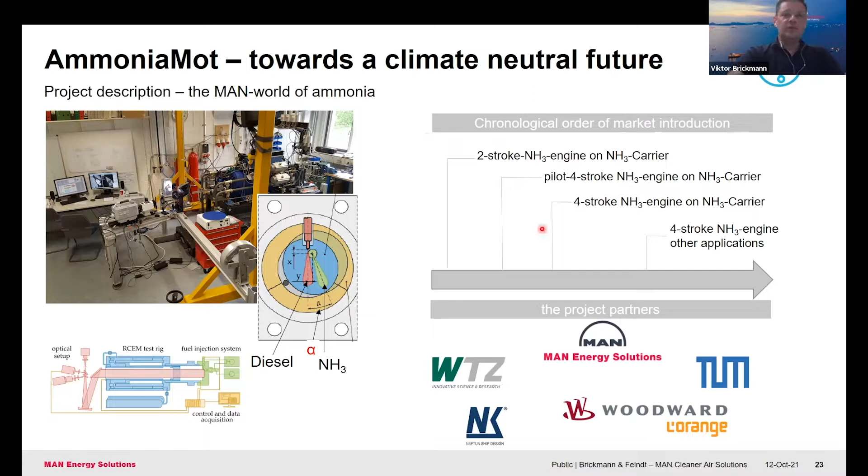Yeah, so I would like to take over from these quite broad and global view that Alex was reporting to you. I'm based in Singapore with a clear focus on high-speed engines, which are usually in the lower power range compared to the big medium-speed engines. So we're talking about a few hundred horsepower up to 4,000 kilowatts, which is around 5.5 thousand horsepower.

Just to wrap up what Alex was saying, in the last few years our company has conducted some surveys with customers to investigate their expectations and views on future fuels, for example in 2035. Hydrogen was number one, a very prioritized rank, because this is the hype or the trend which is quite clear in Europe right now. So many companies are investigating this.

So this means for our company, the way to decarbonization is actually set. We are investigating hydrogen topics in the technology, how to handle this, how to consider the infrastructure and so on. But the way towards hydrogen is long, so we also need to serve the market and the customer needs, which from now on is diesel and gas. There will be some intermediate steps.

For my part, I will tell you a little bit about biogas itself and biofuel, which are considered as intermediate steps between diesel as a fossil fuel and hydrogen. Of course, this is quite related to the combustion engine, to the combustion process itself.

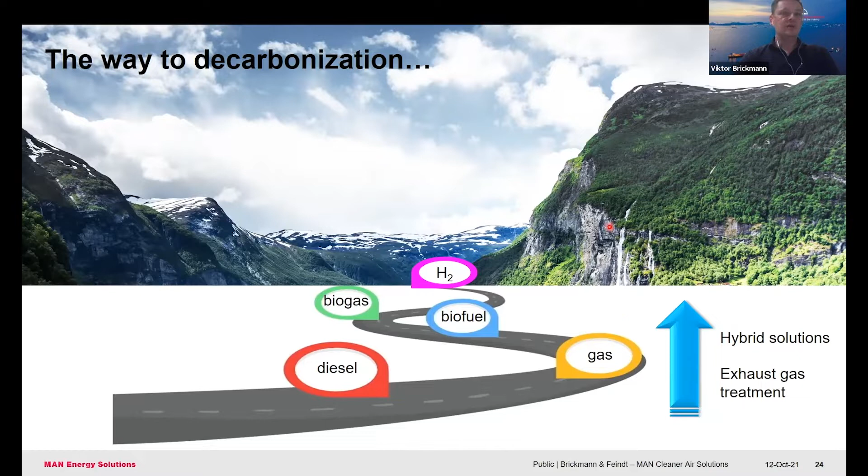First, before going into detail with some technical stuff about the fuel itself, let me show you what is actually the view of Thailand on fuels and energy. This is a screenshot taken from an official presentation uploaded to the internet by the Ministry of Energy.

If we see the comment below, the Prime Minister, during his speech at the Conference of Parties related to the Paris Climate Agreement, was clearly saying that Thailand is pledging to a 20 to 25% reduction in its emission of greenhouse gases. This is a clear sign that Thailand is heading towards decarbonization.

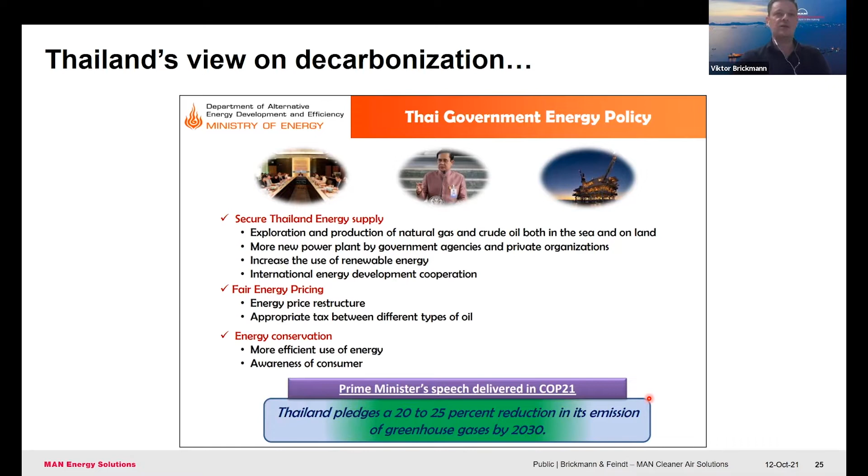Decarbonization itself is an interesting topic. Are we considering the emission itself—meaning, if we're talking about the combustion engine, what is coming out of the exhaust gas pipe—or are we talking also about the complete, entire cycle? This I will show later on.

This is the other slide I'd like to share. According to this approach of Thailand's government, there's a clear alternative energy development plan focused on the years from 2015 to 2036. A lot of R&D activities, as well as construction and power generation activities, are also subsidized by the government. That's why, as said before, I would focus here on biogas itself and biofuel.

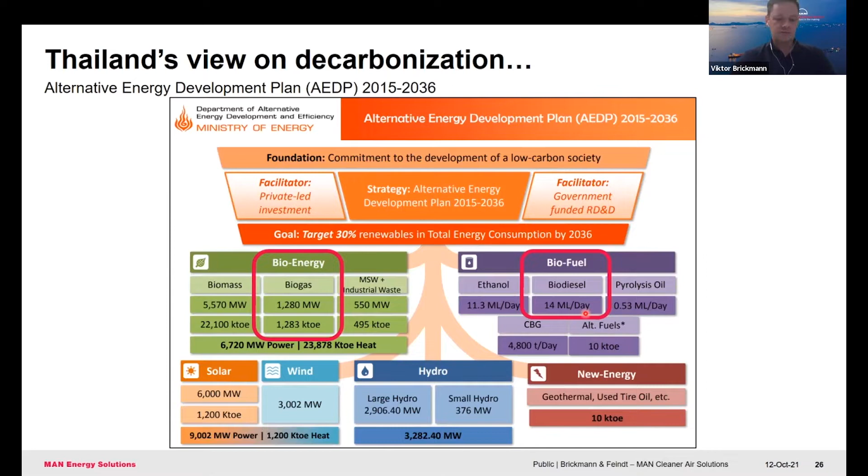Okay, so starting with the biofuel itself—what is actually the biofuel? In this case, I'm talking about liquid biofuel. I'm not talking about fuel in general, because fuel can be everything, but biofuel in liquid form. Actually, it's quite comparable with diesel in consistency—this is a liquid which you can fill up in tanks and burn in the engine.

The question is where the biofuel comes from. Actually, the biofuel is coming from chemical processes of the biomass, from renewable sources like soya oil, or animal fats and tallow and so on. We need to consider how we can use this in our technology. The advantage of biofuels is that the biofuel itself can be considered as nearly 100% CO2 neutral, and this is what I mean.

Of course, during the combustion there will be some CO2 production, but during the production of this fuel, the CO2 is absorbed by the biological processes.

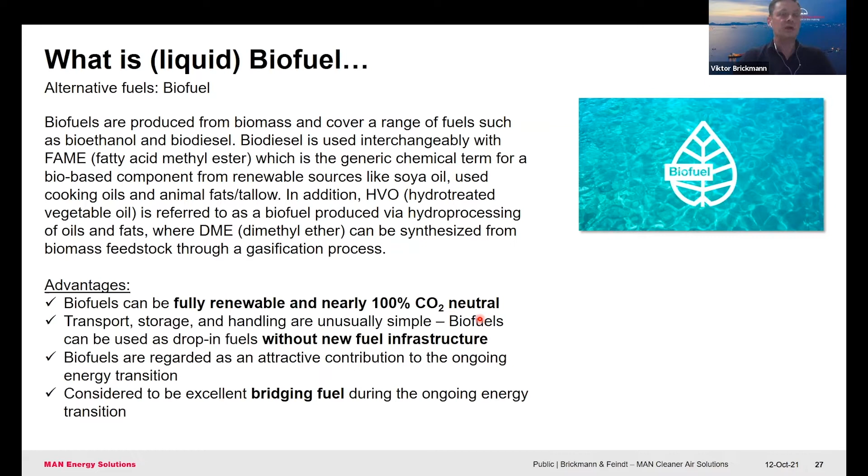Regarding these projects, or the market itself, in Thailand we don't have that many projects focusing on biofuel. The requests from customers are rather coming from Southeast Asian countries like Malaysia and Indonesia, because the governments have a huge focus on palm oil. And of course, if there's an excess of palm oil, the companies are looking at what to do with it, because there are some ethical backgrounds about palm oil, which I will show you a bit later.

So the question is where the biofuel comes from. We define 4 generations of biofuel. The first generation is generally the edible biomass, which can be sugar, vegetable oils, palm oil, everything which can be used for food itself. Currently, if we consider the amount of sources and oil, this makes up 99% of today's biofuel. That's why there's a huge focus on this one.

The second generation is the non-edible biomass, coming from different types of feedstock. It could be waste, non-food crops, for example some corn crops not intended as food for human beings. Some biofuel is coming from animal waste or public waste and so on.

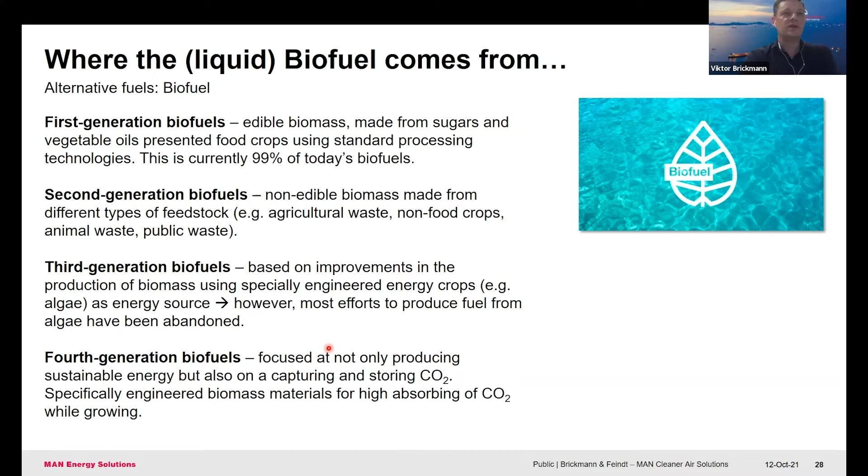The third and fourth generation of biofuels are, so to speak, the next scientific stage of biofuel itself, for example coming from algae and specific engineered energy processing products. We're not focusing on those because they require more investment in technology and chemical processing. So on the next slide, I'm focusing on the major part of biofuels, which is the first and second generation.

The big difference between these two generations is that one of them is edible and can be used as food, and the second one is not edible.

So just to show you the pros and cons of biofuel itself. In general, we can say that biofuel can be almost fully renewable. It comes from animals, it comes from plants, it can be used for energy generation, and it will grow again, like using wood for specific purposes.

And here, similarly, if we consider the chemical processes, which I will not explain here, in the combustion process the generation of CO2 is actually less compared with fossil fuels.

This is, for example, what we found out during our recent test here in Singapore. We have a field test right now with a smaller engine on one of the pilot boats for the Singaporean Port Authority, and we ran this engine on biofuel on our test bed in Singapore, measuring the emissions. Quite interesting is that we had indeed some reduction of CO2, but depending on the source of the fuel, we also had a higher emission of NOx.

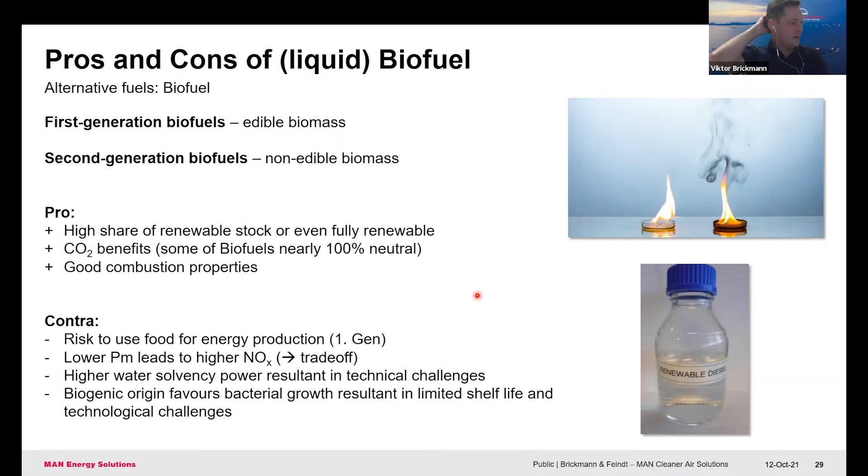The other disadvantage of biofuel, because the source is biological, is that we have a lot of bacteria and bacterial growth, which leads to other technological challenges. For example, we get sludge in our oil tanks, and we have challenges with sealing materials in engines, coolers, or pumps getting untight, so there are leakages. This is what operators, shipyards, and power plants have to pay attention to.

Just to show you which engines are able to burn biofuel - this is a focus from my side. We have the MAN engines, and Alexander was mentioning MAN Truck and Bus. We supply these engines for very different applications, be it marine applications for small ships or a power plant somewhere on land. These engines are able to burn biofuel, considering all the technological challenges we have to pay attention to. The newest generation of our high-speed engine is the 175D.

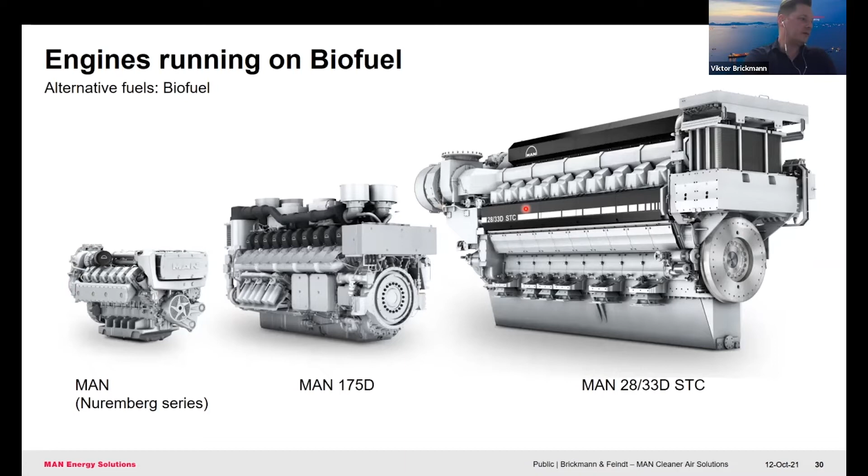This is where the experience comes from. We had some 'children's sicknesses' in the beginning, where we saw leakages of fuel because the sealing materials were not resistant enough. The customers or operators had challenges with fouling tanks and clogged filters, because during the life of the biofuel, even if it's only a few days, we have agglomeration of sludge which clogs the filters. Quite interesting.

That's what I mentioned in the previous slide - Malaysia and Indonesia are looking more at biofuel because they are considered the biggest manufacturers and suppliers of palm oil. The palm oil itself can be used as food - if you know Nutella, this chocolate cream which is quite famous, part of the ingredients is actually palm oil. And this is one of the ethical backgrounds of this.

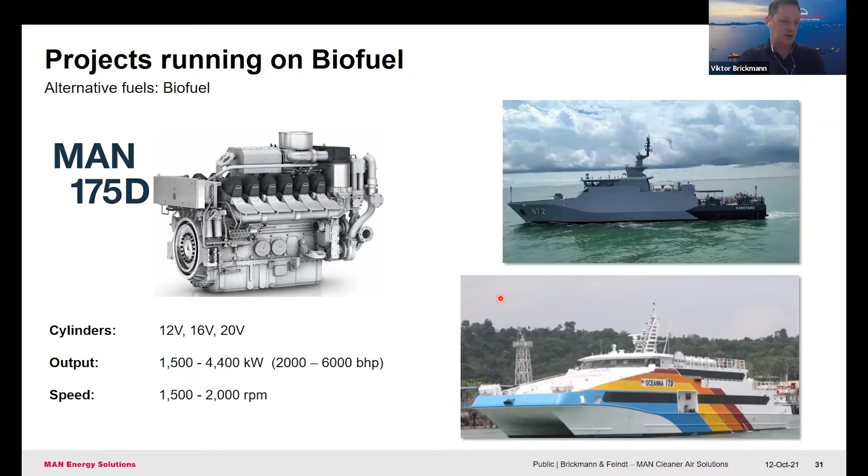How can we burn the fuel itself to create energy, whilst maybe there are children in Africa starving to death because of hunger? This is the way we should look at it as well, not only the technological view.

Okay, there was a mix of marine engines. Now I'm coming to the industry technology itself - the same engines with the same size can also be used for small power plants. In this way, I'm trying to get the transfer to biogas itself. Biogas's chemical process is similar to what we have with biofuel. The biogas is actually coming from biomass and waste products.

Compared to biodiesel, this is a gaseous condition. Biogas has lower emissions regarding sulfur and nitrogen oxides, which is better for the environment, for the air itself. Similar to biodiesel, we have a cycle where biogas is a carbon neutral fuel and can be considered a full substitute for fossil fuels if the engine is able to run it. Thinking back to the slide showing the way towards hydrogen, biogas can be considered a bridging fuel, as long as we are working on higher technologies.

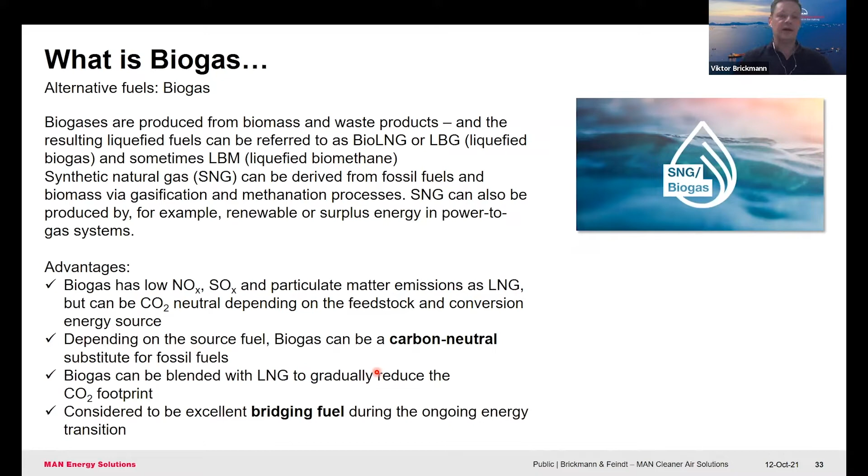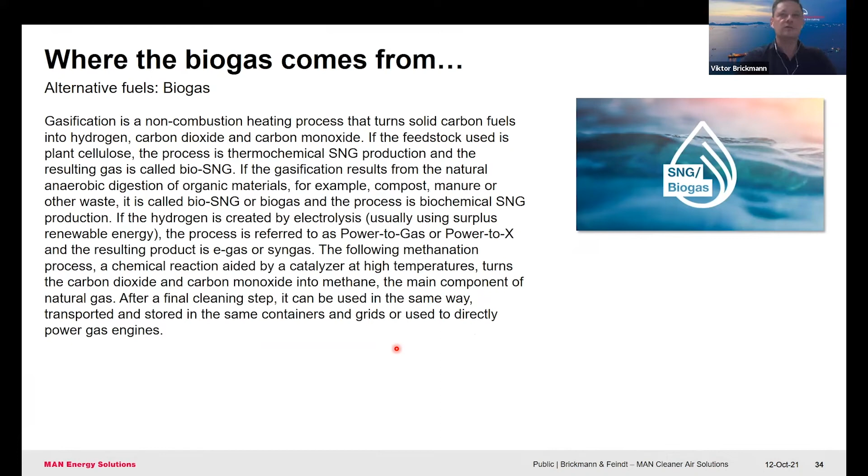Again, similar to biofuel, biogas comes through natural processes which are more understandable from this slide. We see it can come from livestock or just biological biomass. This is stored in a digester, where the chemical processing is ongoing and the gas is generated. The biogas itself is purified to make it sufficient and suitable for engine combustion. The engine can run on gas, and depending on the purpose, it generates heat or generates electricity when coupled with an alternator. This is provided to households, which again is considered CO2 neutral - this is quite a simple illustration of the process itself.

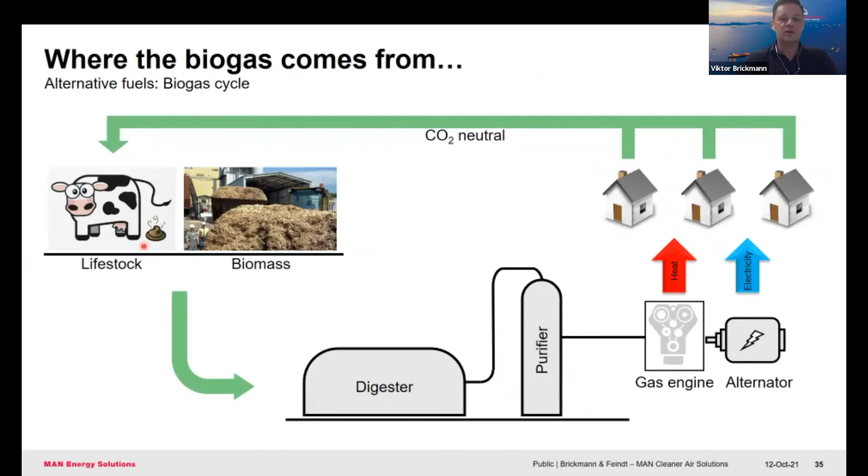So here's just for comparison, how much biogas we can create out of livestock, and how much energy we can produce out of it. For example, one cow produces recalculated 500 cubic meters of biogas, which we can use to produce 1,100 kilowatt hours of electrical energy. To make it more comparable, one cow produces approximately the same amount of energy as 100 pigs or 500 chickens, or 2 tons of corn cobs.

Of course, we need to understand how much space do we have. Thailand might be different. In Singapore, such generation of biogas would be unthinkable because of missing space.

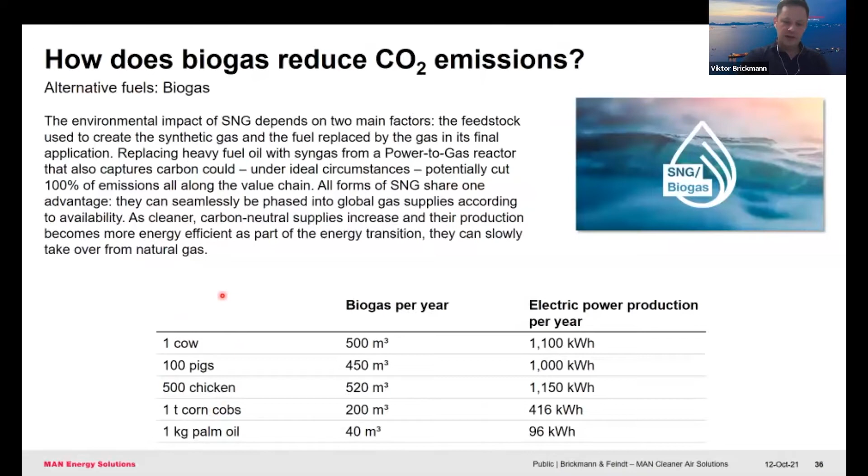For the Thailand power market, it's especially interesting because following this alternative energy development plan, which was introduced by the government since 1992, the government is purchasing electrical power from small power producers, which can be of different applications.

There are some regulations which have to be fulfilled by these small co-generators. For example, they have to supply electricity to the grid during the peak months, March, April, May, June, September, October. During the entire year, the production of electricity must not be less than 7,000 hours, which is a little bit of advertisement for our engines. Our engines are capable of running this amount of hours.

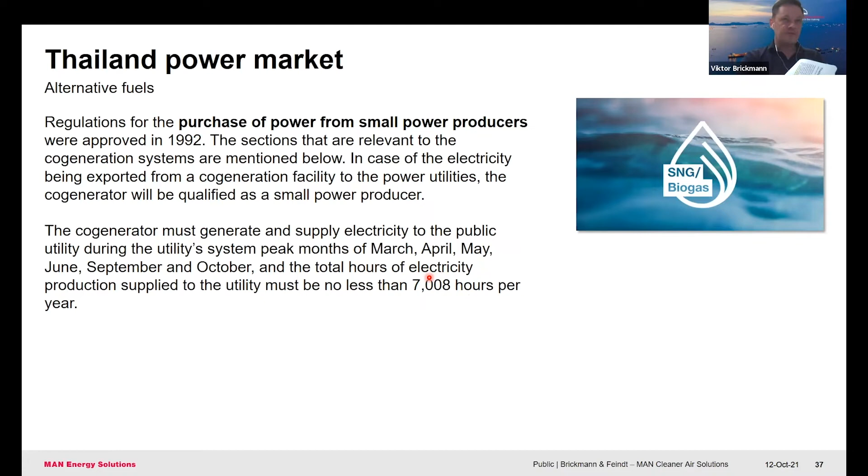To show you what are the references, more or less, which we've realized over the last 10 to 15 years - the main customers in Thailand are the farms, be it palm oil mills or pig farms. One example, we are working with a farm which produces electricity for their own purpose, and they have between 20 and 30,000 pigs in one location.

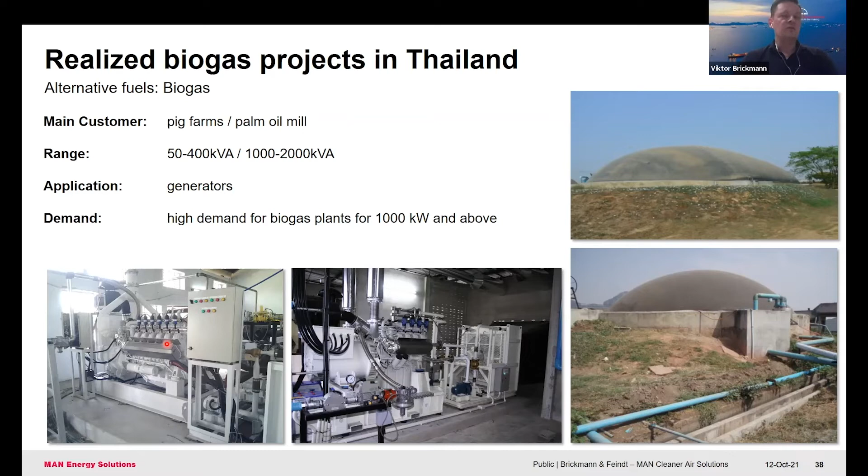So this is about the engines itself, to give you a general overview of what we can do with the engines. Next, I would like to show you another application, a bit more general, which we name as electric thermal energy storage system. This actually has nothing to do with the small high-speed engines, but just to show you how existing technologies can be combined with each other.

I think it's quite clear to many people who have at least a little bit of technical understanding how heat can be generated, how cold or lower temperature can be generated from electricity itself. So if we combine the different technologies with each other, we can have some good synergies.

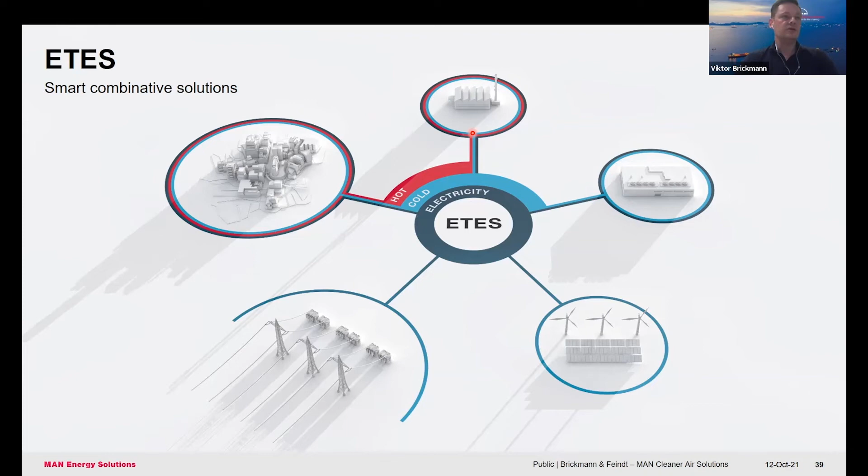For this ETES solution, we can show the first picture, the charging cycle where we have technologies combined with each other - for example, isolated heat tanks or isolated ice tanks. During excess electrical energy, the energy can be fed into the system. Then we would generate heat which we can store, and we can generate cold which is stored in the ice tanks.

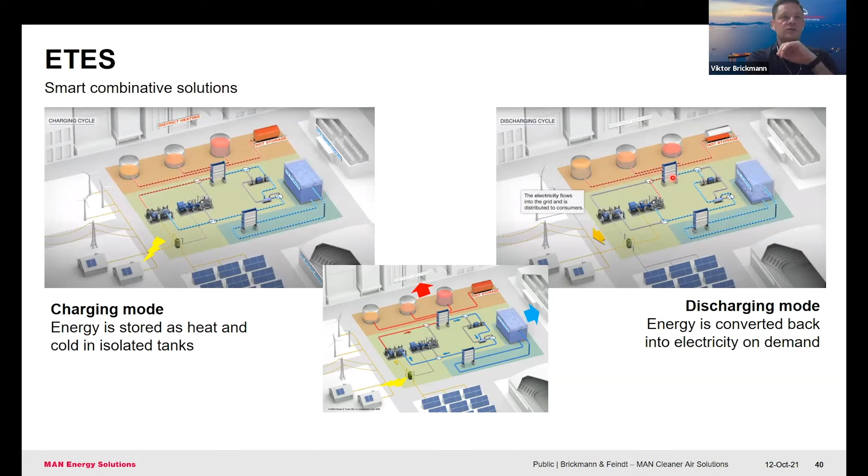We can use the heat for some district heating. We can use the cooling for example, for malls, for grocery markets to cool down the products. The second big part is the discharging cycle - when we don't need the heat or the cold itself, we can reverse the process and feed the electricity back to the grid. So this is the storage system which we can use to not waste the energy.

Just a few technical details about this one - this is a modular design, meaning the equipment and all the components can be bigger or smaller. So we can make a plant between 10 megawatt hours up to 100 plus megawatt hours.

We can adjust it to install it within the premises given to us. In this case, we are working with ABB, a good provider of automation systems, for how we can handle and manage the power itself. The good thing about this system is that it's geographically absolutely independent, so you could put it in a city or in urban areas without any restrictions.

When we talk about energy in excess, which usually cannot be utilized because nobody is using it, this means we can store it for a specific time, and the efficiency can be up to 50%. Because we're not actually burning anything, especially if it's combined with solar power, we're not burning any fuel, no biodiesel, no biogas, no fossil energy. That's why the energy storage itself can be considered fully CO2 neutral.

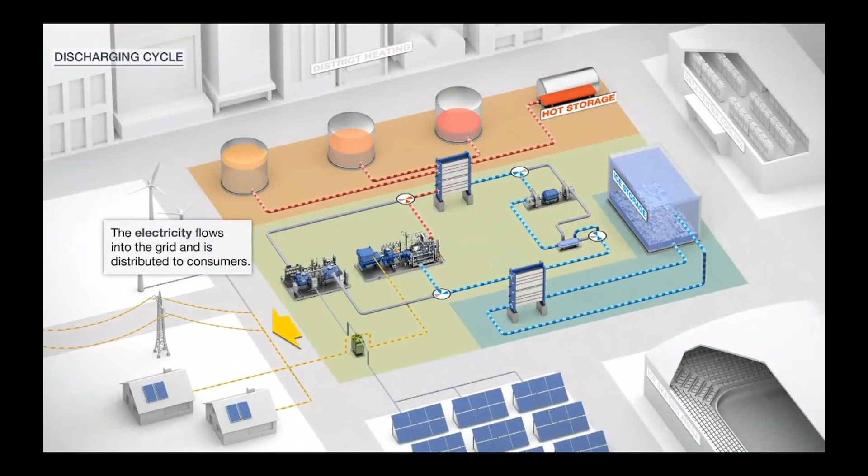Thanks for watching this video. I wanted to show you that there are different technologies, nothing new in the world, which can be combined with each other to create more efficiency and use the energy in a much smarter way.

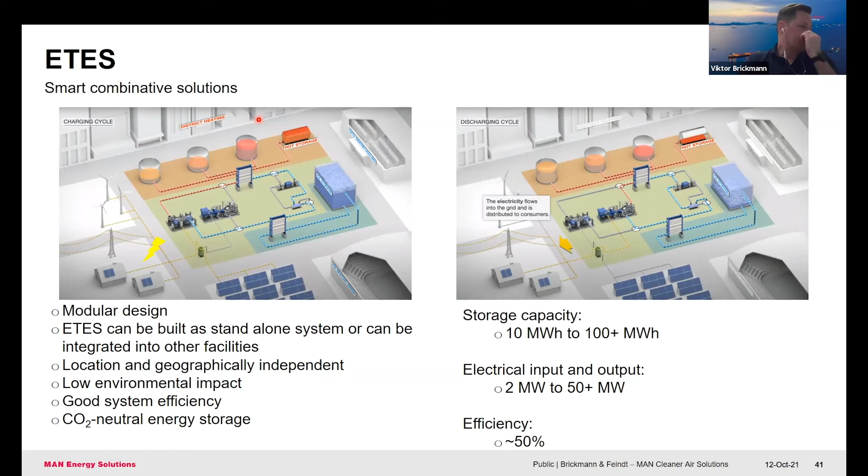So that's it for the ETES technology. Now we are coming to the conclusion slide, just to summarize and wrap up what we have been talking about.

I think it's clear to everybody, just to emphasize that defossilization is possible. With all our technologies, we can achieve lower emissions and increase the efficiency of power generation technologies, be it for marine application or land-based power applications.

Of course, there are a lot of challenges, because we are not yet where we could be in maybe 20 years, but we are working on that, and regulations are coming quite regularly from governments. So there are safety standards which need to be considered.

Alex was, for example, talking about ammonia. Biodiesel is the same - if we have some leakage problems, we have to pay attention to that. I would say one of the most important issues is, of course, the infrastructure.

Right now I see there's one question in our chat box, so this would be one of the possible answers. We have to consider infrastructure in each different country, because the infrastructure in Malaysia might be different compared with, for example, Germany.